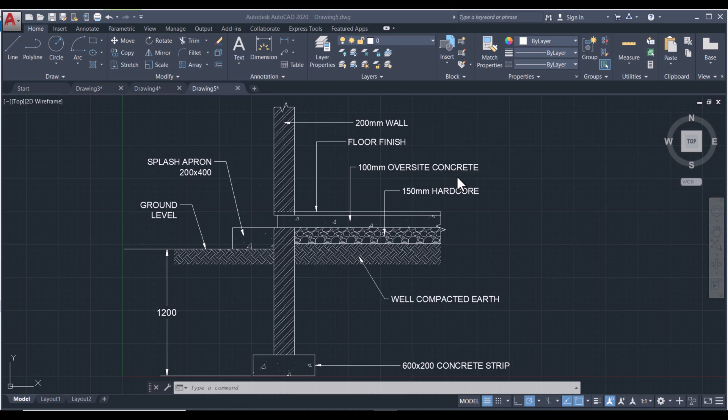Perfect. So I'm going to start off by drawing the ground level. I'm going to start from the ground level and then we shall see what to do.

Grab your line tool and draw a line, and that is my ground level. Now we can see that just after the ground level we get our splash apron. This splash apron is 200 by 400. The height is 200 and the length is 400. So grab your line, I'm going to draw that.

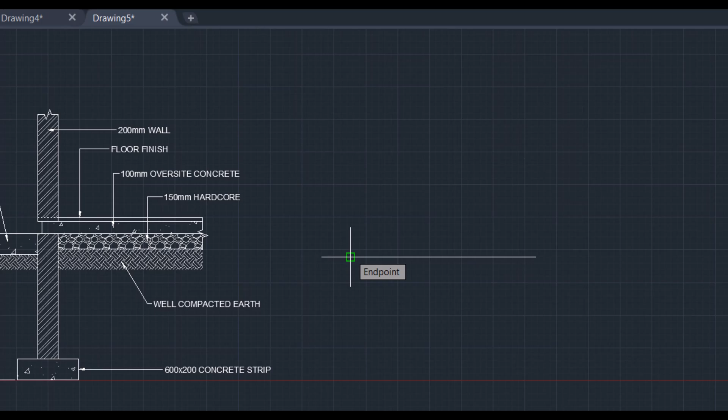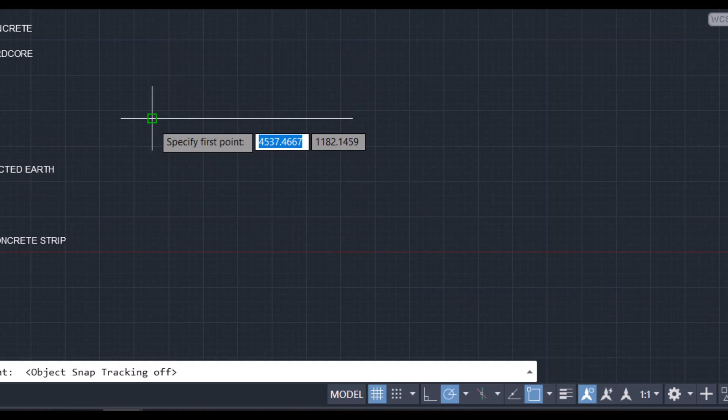I don't want to draw it at the end point, so I'm going to snap at the end point and move. It will create that X, which symbolizes the extension. If yours is not working, then you can turn this on. Simply come and turn this on. Perfect, it will work. So snap at the end point, then move. I'm going to stop around there.

Then I'll draw a height of 200. Then I'll move this other side by a length of 400. Enter. Perfect. And that is our splash apron.

Then after the splash apron, you can tell that we get the wall. So I'm going to draw a line. I'm going to snap here, but I don't want to start from there. I want to start from up this side. So I'll snap vertically just like that. Then I'll draw a line just up to, let's say, down there.

I can still offset this line by a distance of 200. As you can see, our thickness is 200. So offset it to this other side. Escape from that command.

Coming back to my ground level, you can see that that line actually stops at the wall. So I'll trim this other part away, and then the top side of the splash apron, that line continues by a distance that we don't know. So I'll stop it there. I'll stretch that line to there. Perfect.

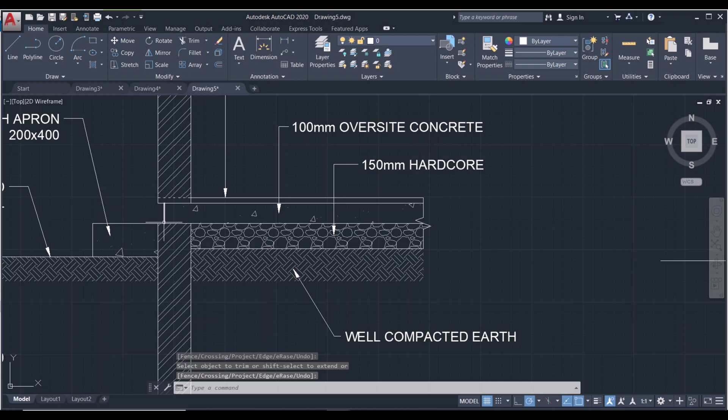Now I'll need to draw the oversite concrete, and I'm simply going to offset this line by a distance of 100. So 100, offset it. We can see that this portion is not there, and this portion is not there. Then we can see that the oversite concrete does not flush with the wall, so we need a depression there.

So I've deleted that line there. I'm going to draw another one. Simply snap at the end point here and move inside by a small distance of, let's say, 35. Enter, and draw that just like that. And right there we have our oversite concrete.

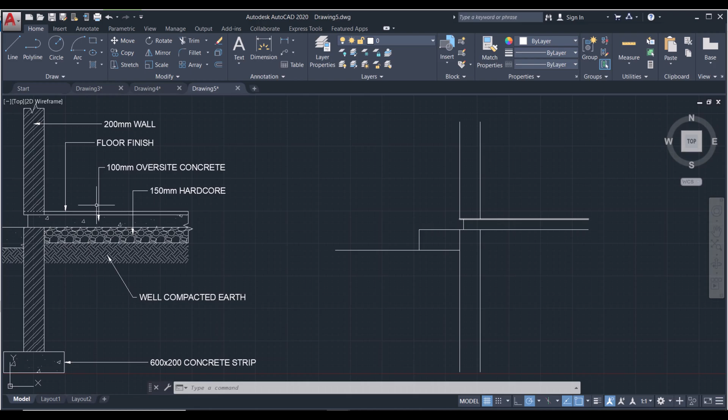Then next we have the floor finish and the DPC inside there. So simply, and this is usually 50, 20 in that range. So I'm going to offset this line by a distance of 50 up.

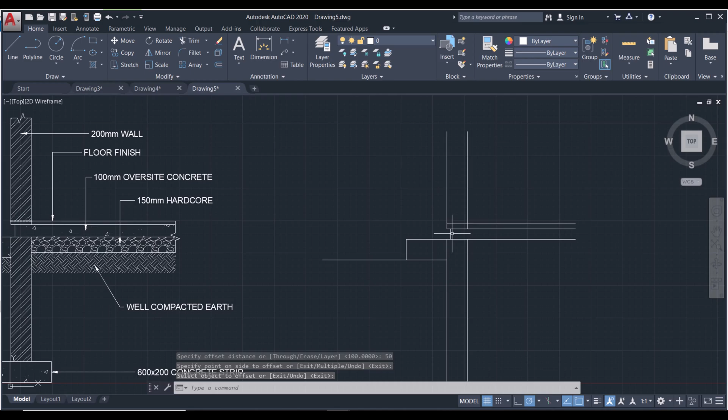50. Now I can see that the DPC is actually dotted, so I'll need to split this line. How do I split a line? Simply come over here to modify, drop down arrow, then you have this option here, break at a point. Select it, it tells us to select the object. This is our object, and it tells us to specify first breakpoint, and this is our breakpoint. Perfect, so we've split the line.

There are now two separate lines. So select this line and come over here to properties, then line type, then we need to change it to AutoCAD. If you don't have this option here in your workstation, simply press other. You'll come up with a menu like this one. Go to load, and then you have loads of line types here that you can select from. I'm using ACAD_ISO03W100, this one. So click it and say OK.

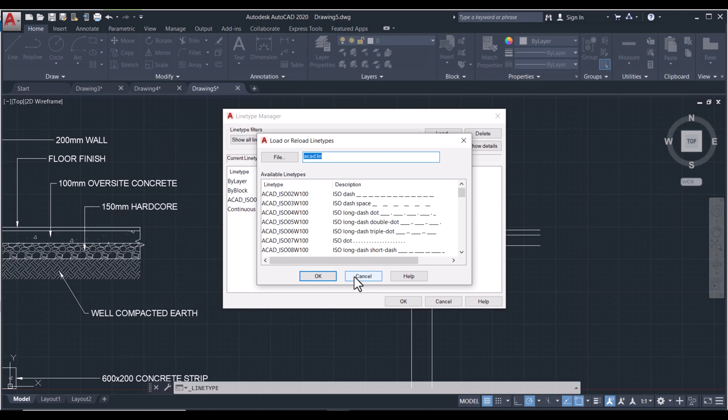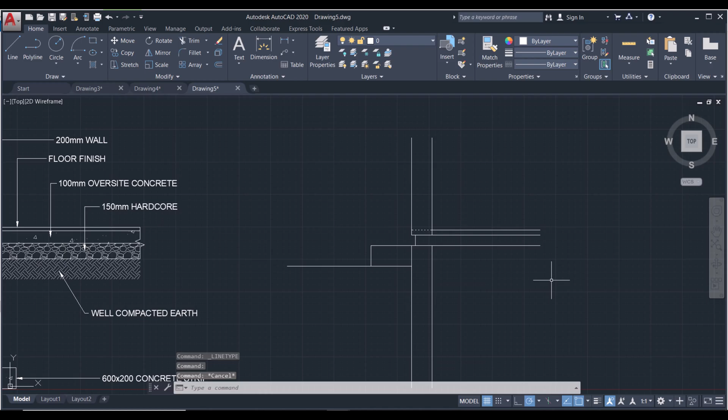Then I already have mine there, so okay. I already have mine there, so I won't click it, but click it on your end and select this line, change it to AutoCAD, and now it's dotted. Perfect. Then what you can do next is you can now include the hardcore.

The hardcore is 150. So I'm going to grab my line tool. The hardcore starts inside this wall. I need to snap at this endpoint right there. Then I need to move a distance of 150 down. So if I get that custom X, I'll simply type 150, enter.

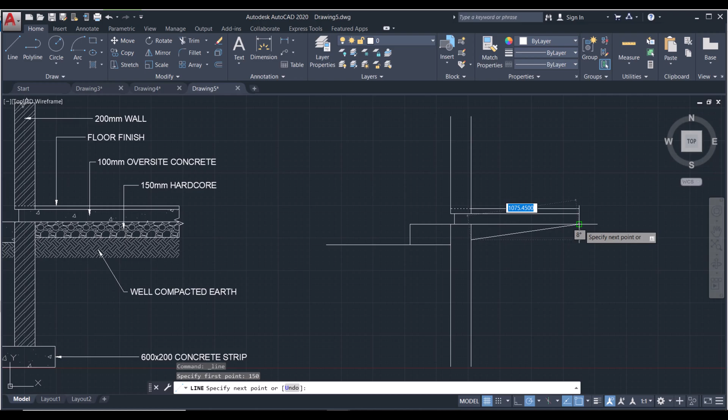Then I need this to flush with this, so I'll snap at that endpoint. Perfect, the line will stop right there. Then we have the earth, we shall input that. Then with that we can now start working on our foundation.

This guy is telling us that the foundation strip is actually 1200 millimeters from the ground level. So from here up to the bottom of the foundation is 1200. So what can I do to draw my foundation?

Simply going to get a line tool, hover over this, select that midpoint, don't click anything, then get that X and type 1200, enter. Perfect, that means this is the bottom of my foundation.

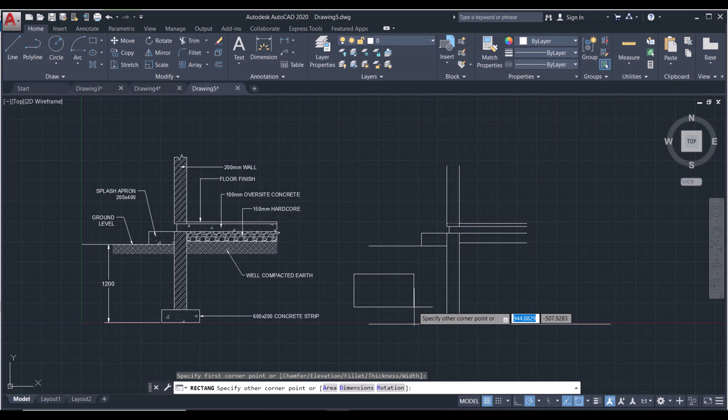Then I'm going to start by drawing this concrete strip, and it's a rectangle 600 by 200. Grab the rectangle tool, draw it anywhere on your workstation, say 600 by 200, enter, and here you have it.

Now we need to move it and position it in the middle of this wall here. So select it, go to the move command. I want to move it using its midpoint, as you can see, the midpoint is snapping. Then I want to move it and position it in between this line and this line. So how can I do that? I could simply

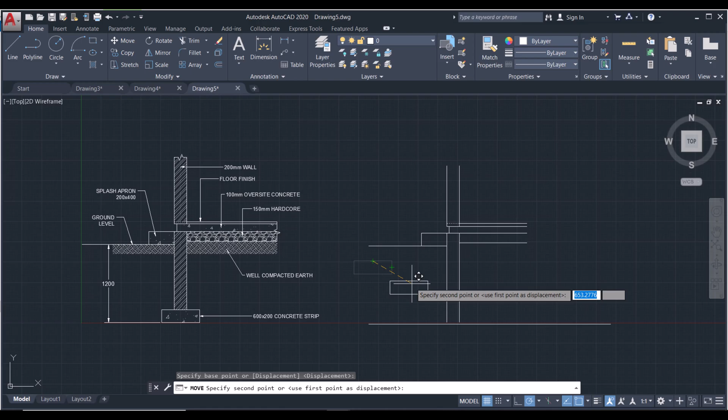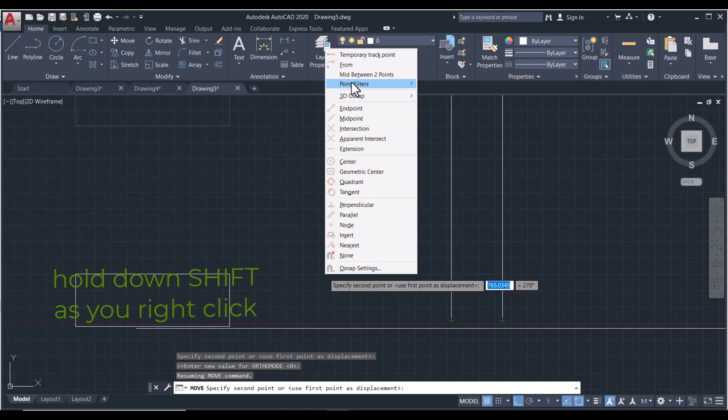Come over here, press shift on your keyboard. I want to press it in the midpoint of this point and the midpoint of that point. So press shift on your keyboard and then right click, then you'll get this option here, then say midpoint between 2 points, so that it will ask you what's the first point. This is my first point, and what's your second point, say this is your second point, and it will position it right there.

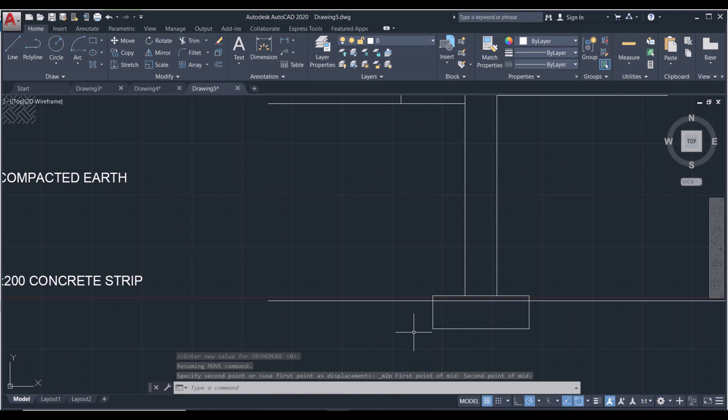Now I've gotten my strip positioned, but I need to adjust its height from the ground level. So I'll need to move it and place it on this line. So select it, same move, my base point is this, and then move it until it is seated on that line here.

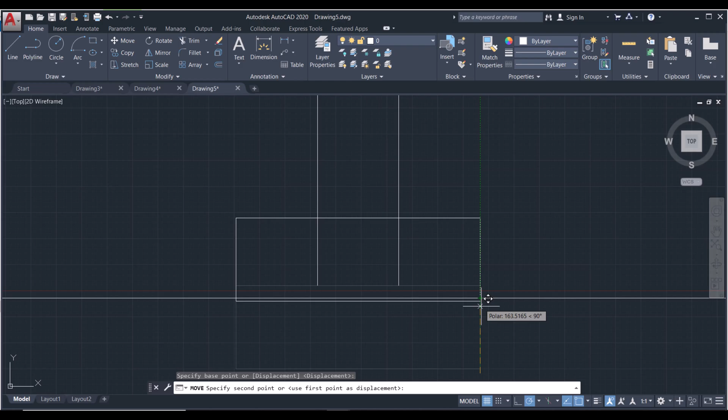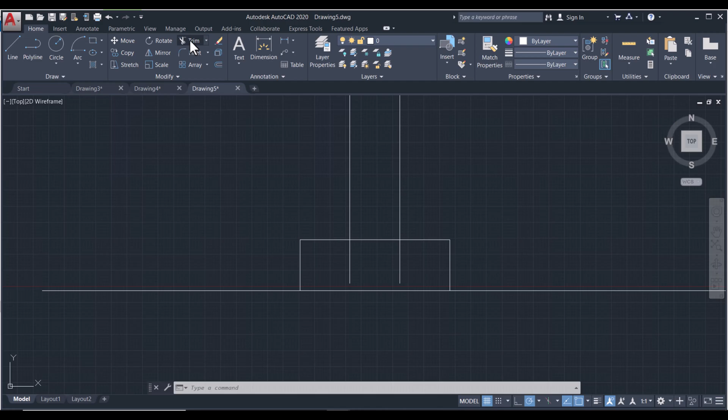Now what we need to do is to put this continuity symbol here and this other side. How do we do that? Simply come over here to Express Tools, press that, then you have this break line symbol here. Select it, and as you can see down here, it's telling me the block is the break line, then the size is 70, the extension is that.

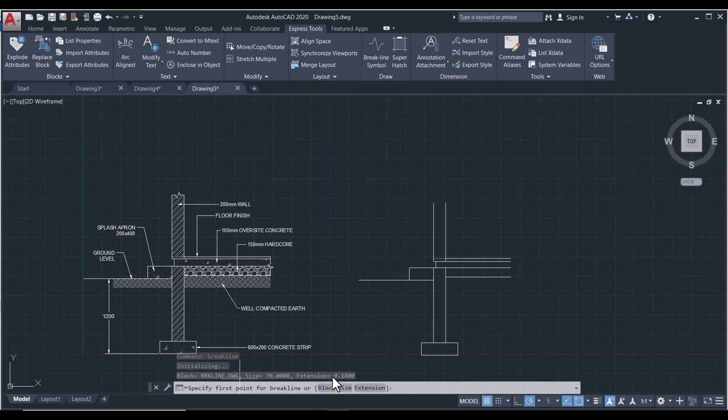So you can check yours, it may not have a size of 70. What can you do to change the size? Just come over here to size right there, and it will tell you to input a size of the break line symbol, and I'm going to input 75. So hit enter, the break line is 75.

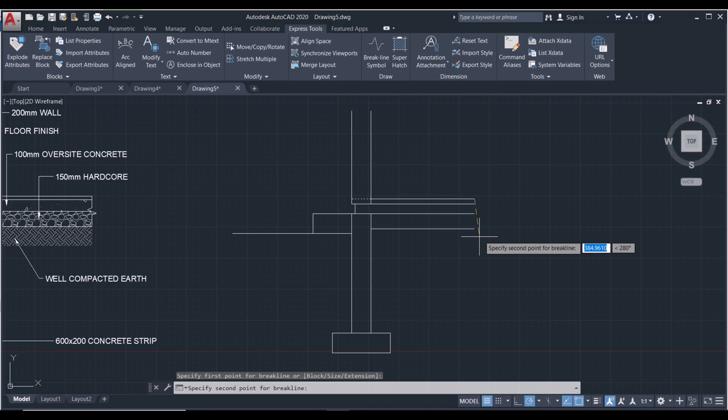Now the size depends on the scale you're using. So it's telling me specify first point for break line, that's my first point. Specify second point, that's my second point. And then specify location of break line symbol, I want it to be there. Perfect, it will put it there for me.

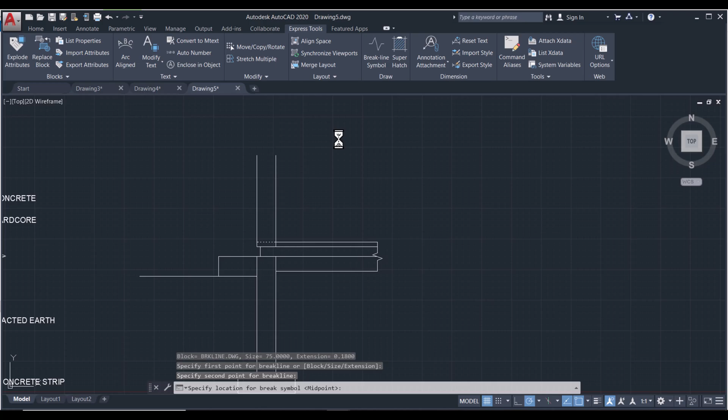So I want the same break line symbol up here. Specify first, I'll say that is my first, second, that is my second. I want it in the middle, and it will put it there for me.

Perfect. Now we need to put hatchings. We need to hatch. Go back to our home tab, then our hatch is under the draw, so click hatch, and you get this pattern here. So there is a drop down arrow, this one, and if you're hatching the wall, it is ANSI 32. So select ANSI 32 and come and press your cursor inside here, and Autocad will simply recognize that space and place your hatch over there.

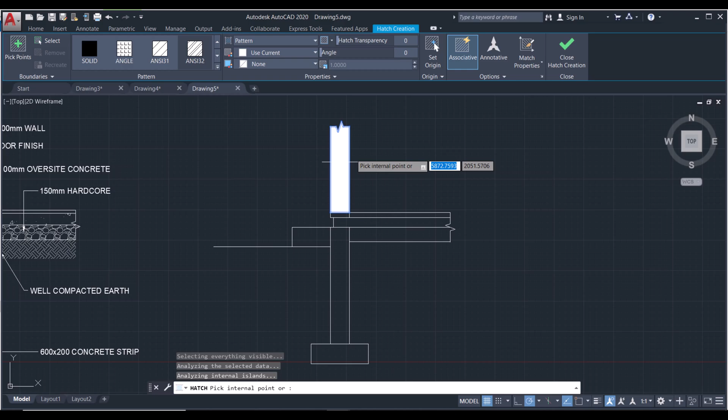Even here, this is still a wall, so place your hatch there. Then we can't see the hatch, so what is wrong? We need to change the scale of the hatch. So I'm going to give it a scale of, let's say, 80. Enter, 80 is still small. Let me give it 320. Enter, perfect, and we can now see our hatch.

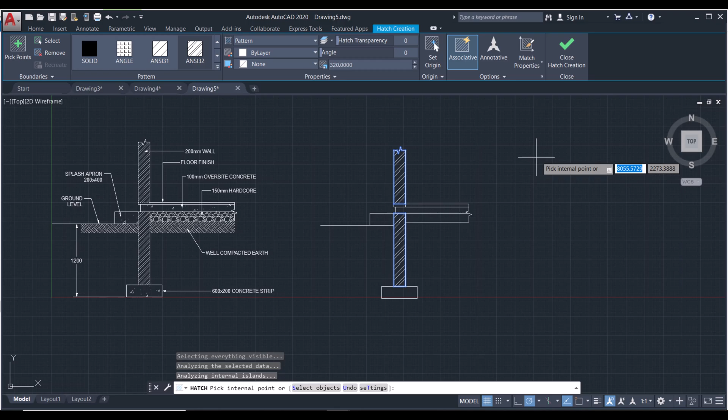Perfect. So press close hatch creation, or press escape.

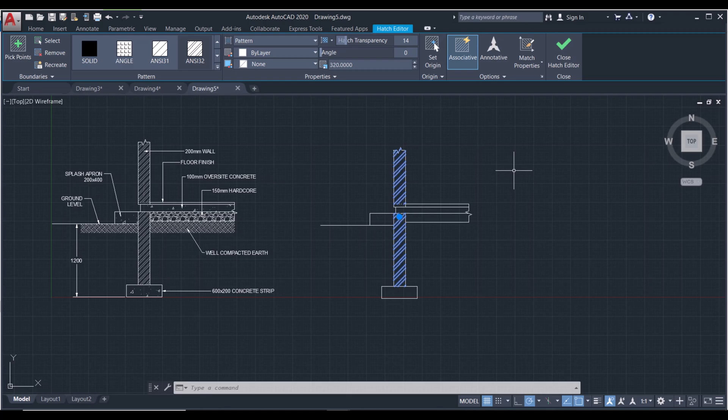Now we can see that our hatch is too visible. Just click the hatch and go back into its settings, then up here you have the hatch transparency. You can type in a value here, or simply manipulate it to reduce its intensity.

Close the editor, and now you can see the hatch is not so vivid. We need to place the concrete sign here, here and down here. Still in hatch, go to this drop down arrow and look for AR conc. This is concrete, so grab that.

We have concrete here, there, here, and there, but we can't see our concrete. That's because the scale is too big, so I'm going to reduce it to 70. Enter, perfect, I can see something now. Let me further reduce it to 50. Enter, and I can still reduce it to 30. Enter, perfect, that's our concrete over there.

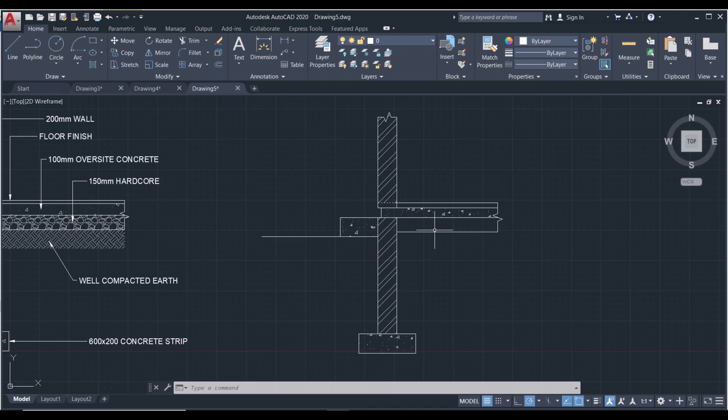Now we need to close this and reduce the transparency as I showed earlier. Then we need to include gravel. So still in hatch, some people call it hardcore, so look for gravel. This is our gravel in here. The scale is too small, so increase this, I'm putting it at 180. Enter, perfect, our gravel is showing.

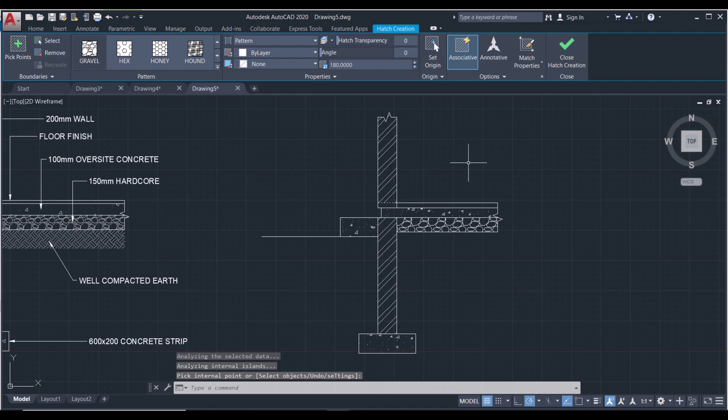Then we need to include our earth. As you've seen, the hatch works with internal points, so I'll need to draw a rectangle here so that I can use it as my earth hatch. So I'll need it to stop here. Then hatch, get your earth. The hatch is called earth.

Where is it? It's here, earth. My application is becoming slower. There, that is earth, and there. Perfect, but it looks small, so I'm going to increase the scale to 300. Enter, and that is it.

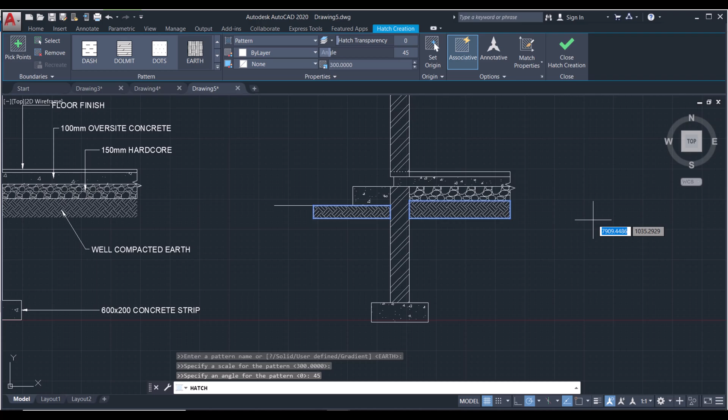But you can see from our question here, the hatch is at an angle, so I'm going to type an angle of 45. Enter, perfect, our hatch will go at that very angle. Press escape. Then I'll need to remove the rectangle because it has done its job. Select the rectangles and delete them.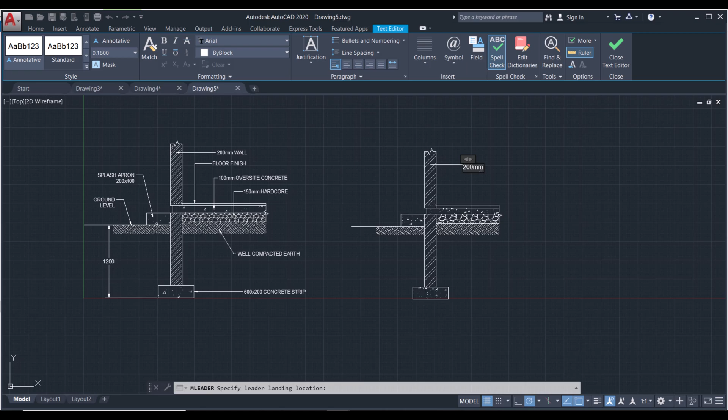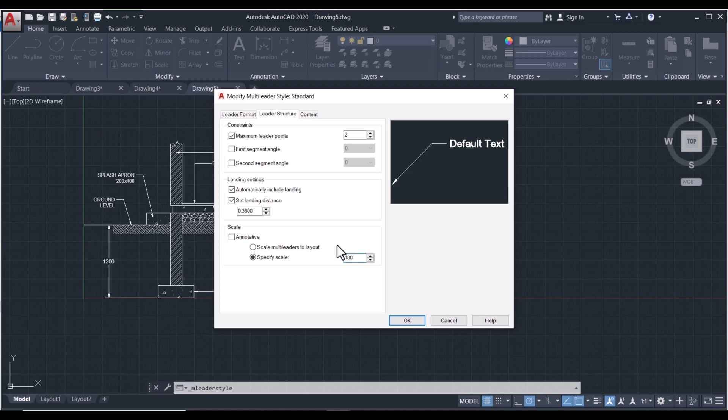Now what I'm left with is to name. So use the leader tool, select that and name, this is 200 millimeter wall. Press aside, but the scale for that is too small, we can't see. So come over here, leaders, modify, and we are going to increase the scale by 180. Set as current, close.

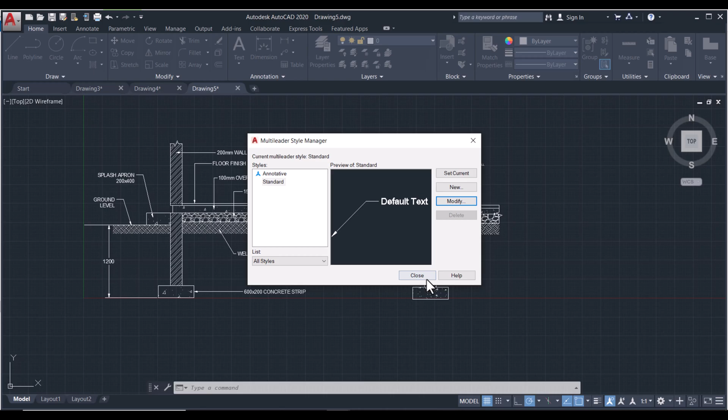That is still small, go back, increase the scale by 350. That will do, this will do, so I can have that. Then you can also label other parts. This is my

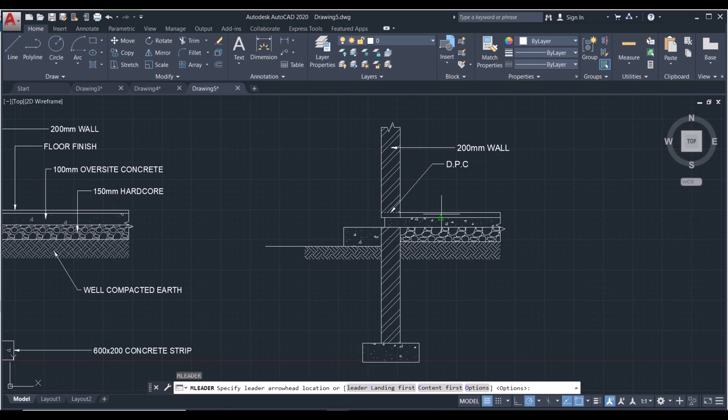DPC, and this is my floor finish. This is the floor finish, and then this, sorry, if it's snapping at the wrong places, you can temporarily disable snap so that you can pick these internal points. So this is 100 millimeters

oversite concrete bed. Then we have our hardcore, this is 150 millimeter hardcore.

Then this is well compacted earth, or murram. Then this is a 600 by 200 millimeter concrete strip.

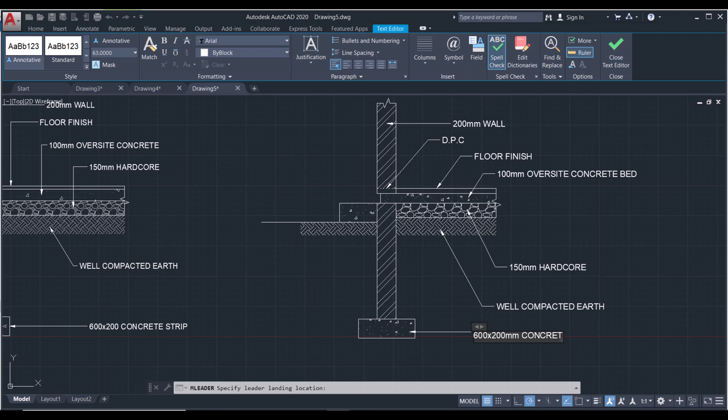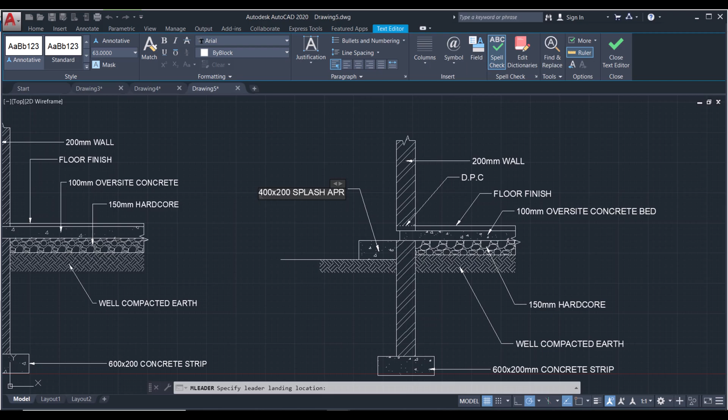Then over to this other side, this is 400 by 200 splash apron. I love that name. Then finally we can name our ground, so turn back on the snap, come over here, snap there, extend, and I'll say this is my ground level.

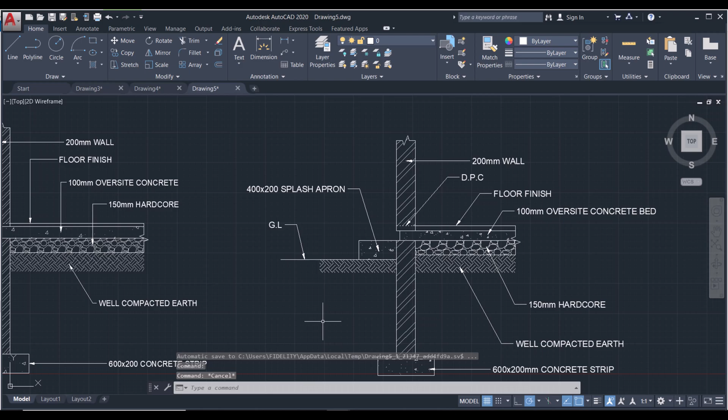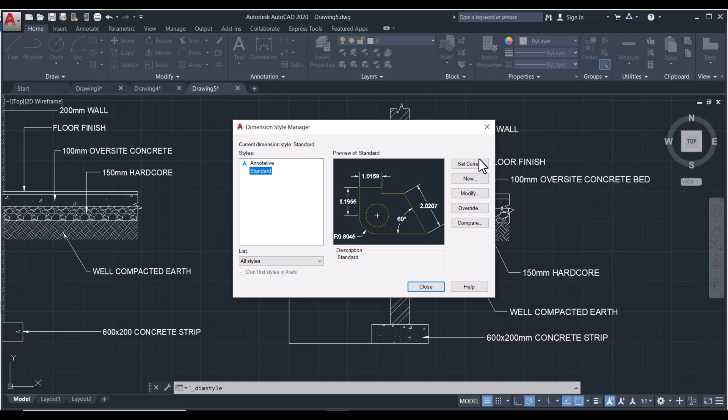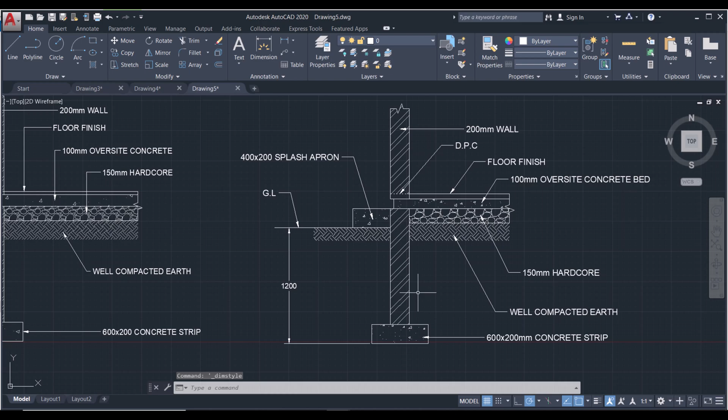Then I need to include the dimension, and they are telling me this and that is actually 1200, but the dimension is not visible, so annotation drop down, dimensions and modify primary units. I'm going to set the precision to 0 so I don't have decimal places. Then I'm going to use a scale of 300. Close, perfect, that works fine, and there you have your strip foundation well detailed.